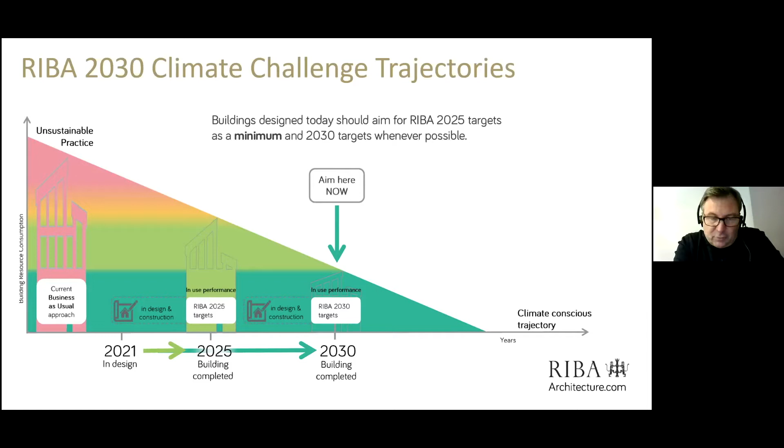We can see here at the left of the slide, this is the current business as usual approach in terms of building regulations. Most of the time we build buildings which are unsustainable, and we know it's unsustainable in terms of its operational and embodied carbon. What we're trying to say to everyone is actually we've got to start now in 2021, because the time that we're on the boards now, and generally a life cycle of a project for a larger project is 3 to 5 years. So by the time you design it now on the boards, it's 2025.

It's going to come into operation, and then we need to be on the way towards net zero, because in the big scale of things, we can't build any new buildings that are going to add to the problem. We're also encouraging a deep retrofit strategy approach, where really by 2030, all new buildings and all deep retrofitted buildings should be net zero. And that's really then the elephant in the room - we've got to deal with the 45 million existing buildings that are the worst performing in Europe.

So the point here is really saying, start now. 2025 is coming around the corner, and it only really gives most design teams about two iterations to get to a point where we're delivering net zero in practice. So that's really the urgency of the situation.

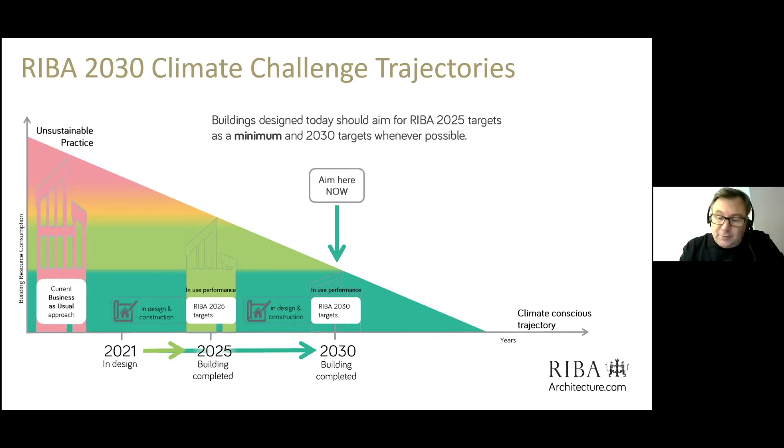I'm just going to show some examples of how I've tried and come close over my career, which is now 30 years, and I would say I'm not satisfied. I've come close, but it's extraordinarily difficult, and I'm not finished yet. Really, with the work at HOK, and obviously trying to persuade others, we've got to do better, and we're going to do it more consistently.

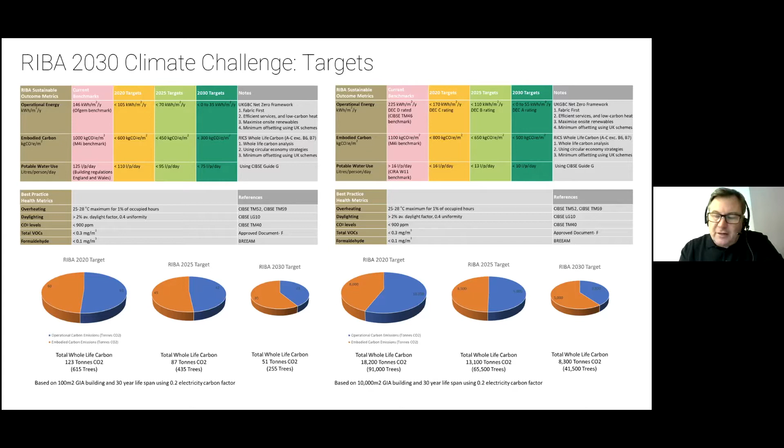It's 70 kilowatt hours per square meter, which is a 68% reduction from our 2030 target, which is within that window. We're trying to get down to 70-75% reduction before you factor in renewables and offsetting, and that's probably where we think the sweet spot is for non-domestic buildings. But that's without renewables—no PV, and no heat pumps either. It's a passive house approach, and it's a fantastic building.

Again, I'm sure you know it well from Cambridge. Anyway, that's our target—how close have I come? Well, not as good as that, really, I'm afraid. The final bit is that all that data is going to be in the awards as well.

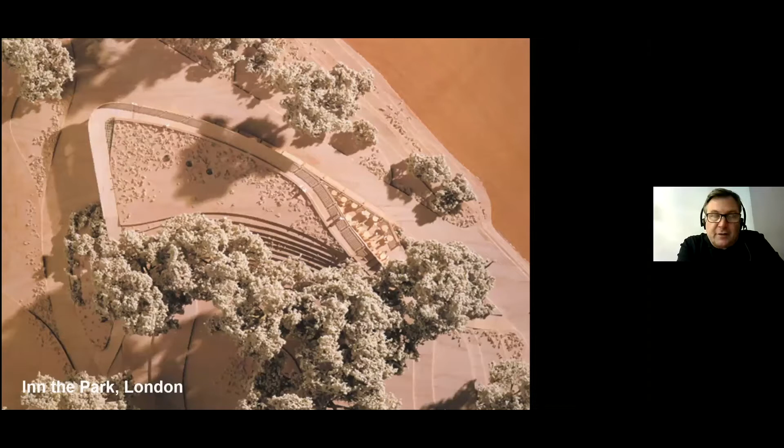So the first one is from when I left academia and joined Hopkins Architects, and really shared my philosophy in terms of expression, especially natural ventilation, and how to use that for meaningful expression of architecture, but also to achieve low energy buildings. My first project was this small pavilion in St James's Park in London.

It was an earth-sheltered building, and the reason was the very high scrutiny in terms of planning from both the mall and around. It had to be a very low profile, but obviously part of that earth sheltering is very much an ecological approach to building in terms of low profile, low impact. But obviously there's a story to that in terms of embodied carbon.

Effectively, it follows the listed path of Nash. So the front curve of the building follows that path, and that line is actually listed—that's why it's that shape. Then we had to weave that between the existing trees, which we couldn't risk knocking down, and that generated the whole concept of the building, with the path weaving over the top and through the trees.

Then we were trying to make this wholly of timber, again for obvious reasons in terms of embodied carbon. We went through a whole exercise of choosing what type of timber, but we wanted one that would age gracefully, with no petrochemicals in terms of its preservation—only a few timbers hit that bill. This was larch. Now, the larch in the UK, unfortunately, is a bit too fast growing—it's good for cladding but not for structural purposes, so we had to go to Austria.

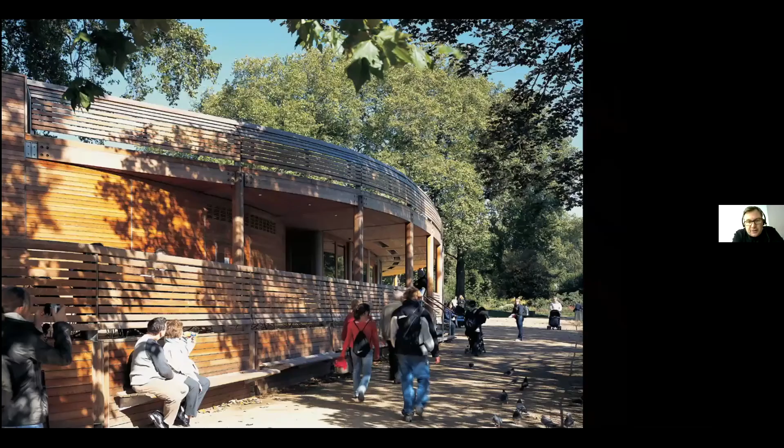These are the logs when sawn into the major planks, and this is the finished building. We can see the front of the building, all timber structure. This is when it was completed, still quite honey colored, a lovely color, and it's been left uncoated to silver naturally.

But unfortunately, in city centre pollution the particulates in the air actually darken the timber a little bit, so it doesn't silver as well as we'd hoped. I think if it was in maybe rural Cambridgeshire, it would look even better.

But the idea here is using basic principles. It's facing a south east location overlooking the lake, setting up layers where the public can engage, interact, and sit in the building. Then you create the loggia, a sheltered area providing shading, gradually going into the various layers of the building, and along the top there's a walkway where people walk over as well.

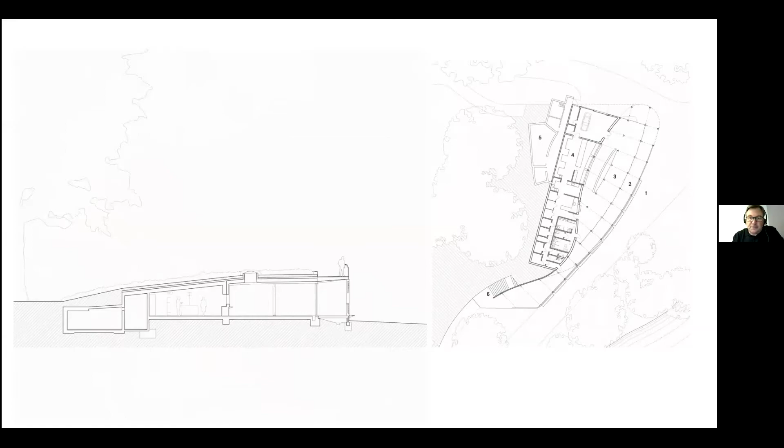You can see it from the outside, gradually coming to the rear of the space where the servery is, which is the front of house and back of house area, and roof lights are introduced to balance the daylight and get fantastic light.

The front of house is all naturally ventilated, and it uses the kitchen extract for thermal recovery, which drives the major ventilation strategy. There are automatic vents at the top and manual sliders as well.

It provides this lovely spot in London, and it really embodies this sustainable aspect, that operational energy is one thing, embodied carbon is another. We had to introduce some concrete because of the weight of the soil above, but it's about health and well-being, regenerative, restorative design principles, creating a lovely place that will be sustainable because people love it and will hopefully use it for many years to come.

That fed into another project which crossed over with Bill Dunster, the Jubilee Campus at Nottingham University. This is a fascinating side of it - it took a brownfield site, the Raleigh Bicycle Factory, and created a new campus for Nottingham University. These are the pavilions that were created, a concrete structure with a 50% GGBS cement replacement, which helps a little with the embodied carbon.

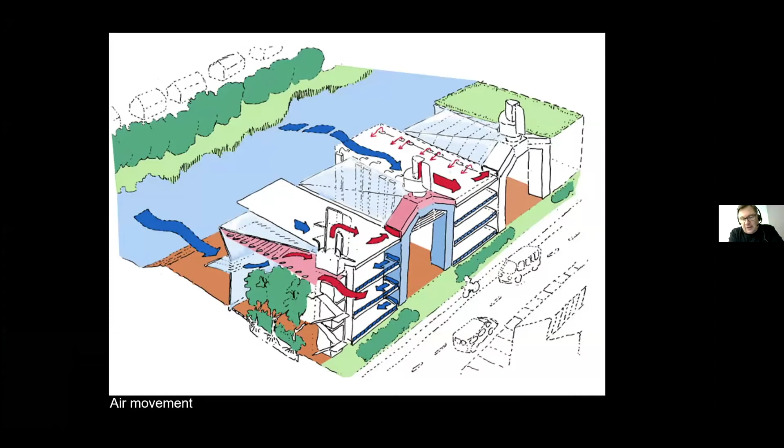And then that's free venting. In this case there was a wind catcher, a combined wind capture and extract over the main cores, which helps drive the actual mechanical ventilation.

It was then developed a little bit from the wind catcher, but you can see here a diagram of this package plant, really lovely design, working with ABB in terms of the bespoke plant, a big thermal wheel in there, and then incoming air mixing with the thermal recovery with a ventilation bypass towards the rear, and the wind cowl reducing that velocity just to maintain that negative pressure.

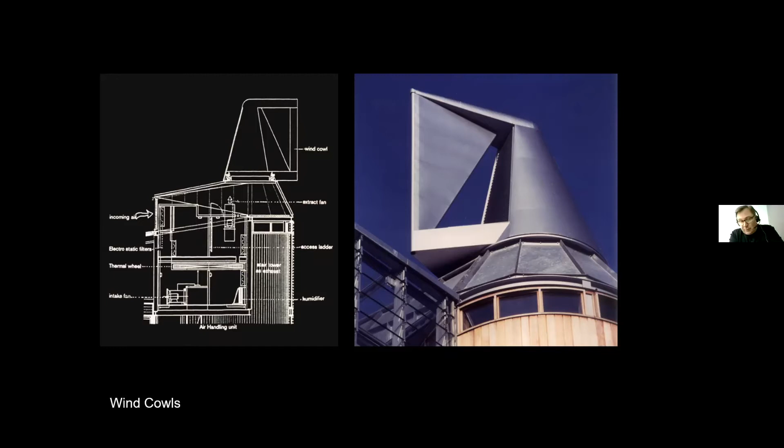So again, the thing here is the university, this work, it's really an expression of this kind of natural ventilation, which is very much part of my early kind of work as well. So that's why I was naturally drawn to Hopkins. And this is the final shot in the front. This is the business school, the last phase on that.

So we were using soft landing principles, working through and looking at the previous phases. It's slightly different in design in that the client - I started off saying, well, let's build another version of one of these pods, but the client wanted the larger building for the same cost, and it had been 5 years different. So again, that's why we lost a little bit of the wind cowls. But working with ABB, we managed to minimize the reduction in energy use because of that, using the same principles again.

So all that then fed into another building at Hopkins, and this is one of my last ones there. It was the Applied Research and Development Center at Northern Arizona University. And it's quite an odd assignment.

So this is where the university - the estates director was at a conference at Jubilee campus, loved it and said, I want these guys to build our new building. And they wanted the greenest building in the world at that point. So again, it was a big challenge, that one.

And this was a lovely facility which was taking all the ecological and biological departments in terms of postgrad and research, and put them into one building. And again, it's that incubator type approach where all those ideas would actually be cross-referenced. So it was really a real center for that.

When we actually did the competition, I calculated our carbon emissions of flying out as a small team every year, every couple of months to do this. And the benefit of the reduction of energy that we were aiming for the building would far outweigh anything we were traveling with. So I think we had to be very sensible about that in terms of how we do it. But we worked with the local architect as well, so we didn't travel over too much.

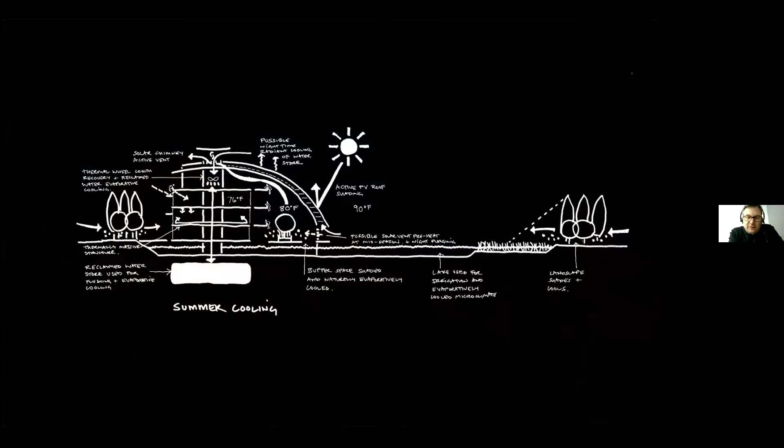And then really using the principles of what we'd used on Hopkins before, you've got this kind of central core of a heavyweight building for thermal mass, linked to ground source heat pipes, and then sheltered with a kind of atrium type space.

This location was facing southeast rather than south, but it's quite high altitude in terms of Flagstaff. It only reached about 75 even in midsummer, so it's 7,000 feet up. So again, the climate was very much closer to a UK perspective.

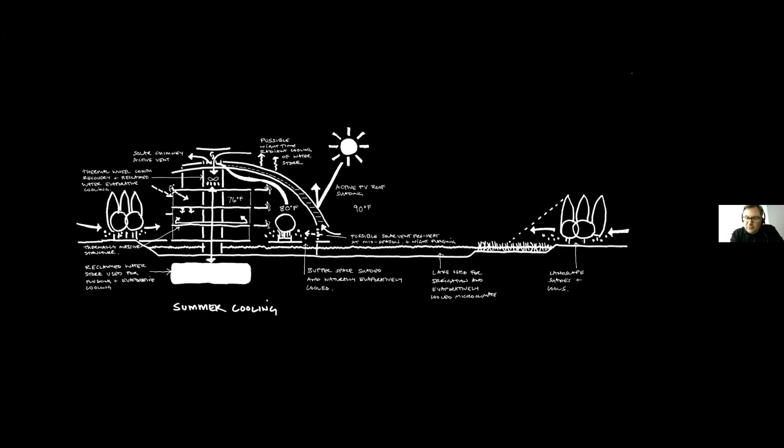And this is going to approach it at the base there. It was just this layering effect, creating a street where you have interaction of all the departments and all the staff there, movable green screens as well, and then other departments fanning out towards the north there. So it's almost like shop fronts.

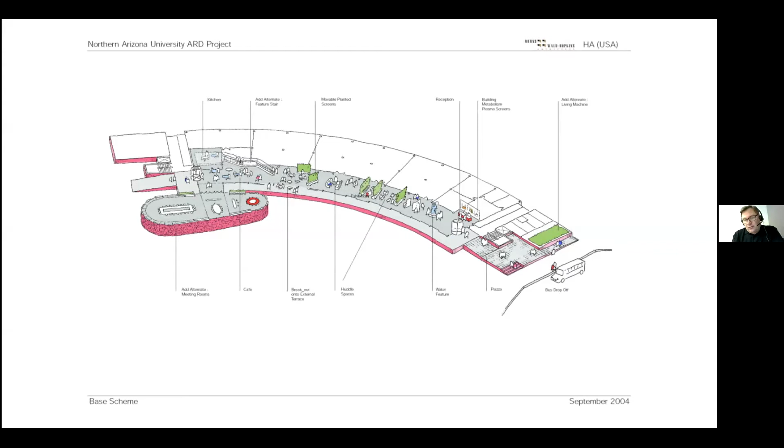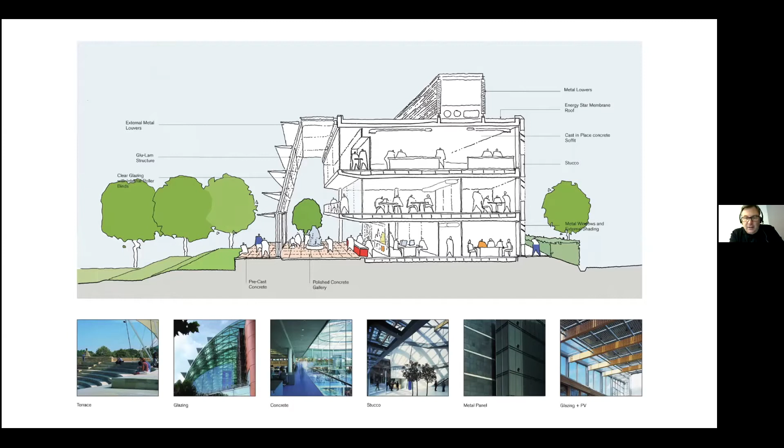And this is the section a little bit more developed here, showing the kind of terrace. And we used examples of other Hopkins buildings - this is Dynamic Earth toward the bottom left, we've got Evelina as the glazed atrium, we've got the Forum in Norwich, another one of my buildings, using that kind of concrete finish, and then aspects of Jubilee campus there, creating a lovely kind of section.

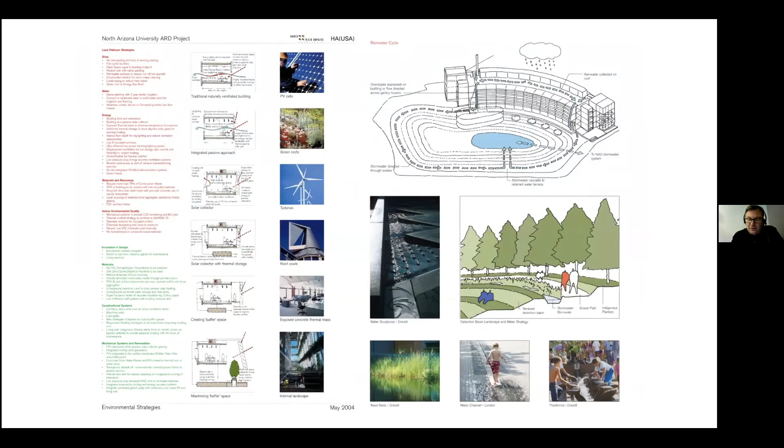You won't be able to read any of this, but it shows that even back then, the entire sustainable outcome cycle was considered with ARUP, our engineer. The whole life cycle, even the water cycle of how we dealt with rainwater, was part of that mix—it's all integrated. Great project and good delivery.

This is a couple of shots of the finished building—this is the atrium facing southeast. All the external louvers were tuned to that direction in terms of orientation and size. And then the inside of the space, getting good quality daylight in there with no lights on, gradually coming back into the departments. Really lovely building, and well loved.

I think that's the thing. Oh, one final thing is the timber you see there. I tried to use timber on the outside, and it was a curious thing—different cultural perspectives. We're trying to use much timber in the UK, but the green fraternity, especially in the mountain areas of the States, were very sensitive about using timber because they know there's been quite a lot cut down, so they avoid using too much. But we actually managed to get this timber glulam in.

This is actually glulam timber from trees caught in a fire—the Rodeo-Chediski fire. The core was still okay, and they were salvaged and made into glulam. A lovely story of using some of that timber.

At the end, we did deliver in terms of LEED—this was the highest LEED rating at the time of any building, and I think we almost got full marks. At that point, 62 or 64 was the maximum, so we got that LEED platinum rating.

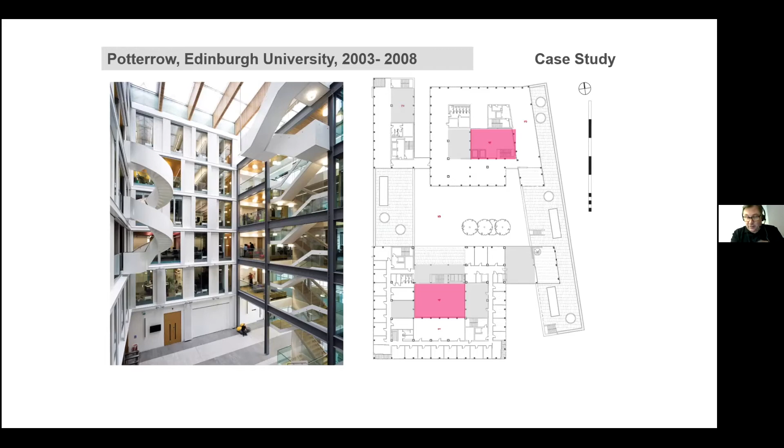We can see here this is the diagram, which is very simple—tuned in terms of the depth of the building, with large atriums in the centre which act as stack drivers. It's a mixed-use scheme as well, but really trying to get that nice quality of daylight throughout the building. You can see here, this is a very lovely, very active frontage, picking up similar principles to the building in Arizona.

This is our environmental diagram, again showing the classic stack effect. I was a bit concerned—I think it worked out fine in Edinburgh, but I was concerned we didn't have much of a reservoir at the top of the atria. But in the net result, Buro Happold, the engineer, used a bit more fan power to make sure it didn't overheat on the top floors. Again, it worked well.

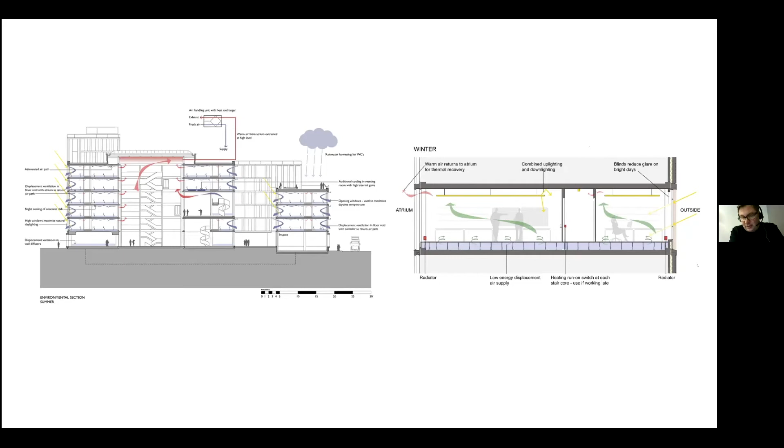Lots of tuning issues when we were doing the handover—very in-depth discussion, especially trying to balance up the displacement ventilation system. And this is a view of the inside—really fantastic spaces throughout, and again, well loved.

The sustainability is all there—it's a lovely building with quality of light, good health and well-being, and an asset to the university. It's really seen as one of their best buildings.

This is a small project that unfortunately didn't get built—that was in the last recession, so I've got more projects that have actually been designed than built. I think that's the reality of practice. But this was a great project—this shows them right in the foreground, and you can see some wind cowls.

So all the lessons and things I'd really be keen to build were really integrated into this project. This is a commercial office building, and this is what it looked like when we found it. The client was great - an ex-architect who really wanted to say, okay, rather than knocking this building down, let's see what we can do, retain the embodied carbon, and try to show a showcase of how you can do a deep retrofit to an existing building and actually make it attractive and sellable.

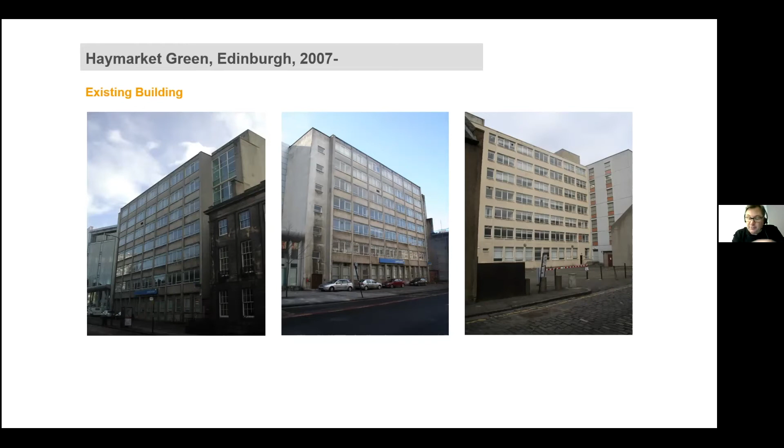So what we did was we clipped on a new core, cleared out all the existing things in the building, and created more open, flexible floor plates. Working with Max Fordham's on this one, we actually stripped it all back and exposed the concrete.

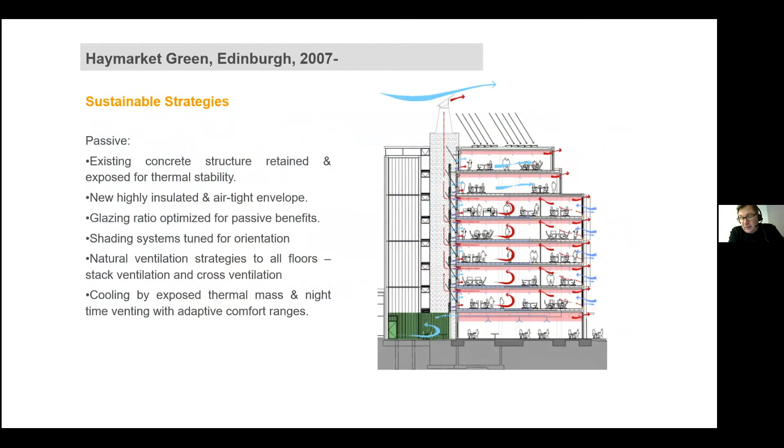Working with Max Fordham's, they did some CFD analysis as well, and we said, right, this is a naturally ventilated office. Can we do this in a city centre, a busy city centre, with all the pollution and noise and so forth? In terms of the modelling, I think we could do it, but it's a shame we didn't manage to finish it in the end. But there we go, and this was the kind of net result.

Remember, this is back in 2007. You can see here we were trying to head for a 75% reduction in CO2 emissions. We talked about natural ventilation being possible. We were looking for an A-rated EPC, BREEAM excellent.

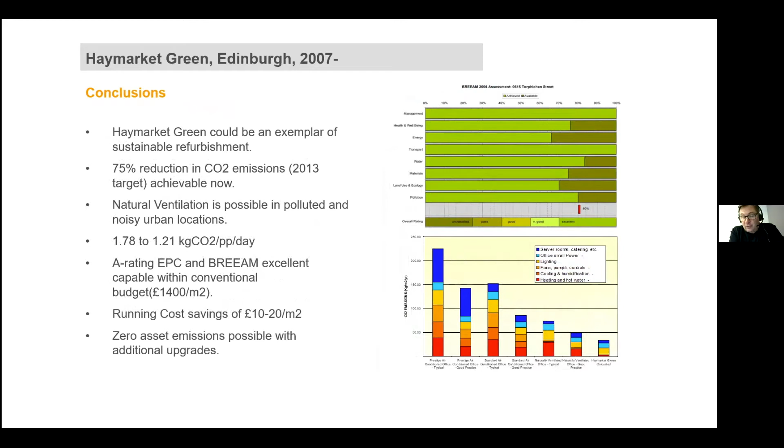And then the budgetary side was interesting - we saved about £400 a square metre by retaining the frame. Not only that, but obviously the embodied carbon as well. And the running cost, because of the more naturally ventilated approach than the conventional mixed mode or mechanical approach, we thought we could get some really significant savings there too.

So unfortunately, chalked down to experience, and then really onto taking all of those things, still keeping all those lessons in terms of the various other firms. I joined Wilkinson Eyre back in 2012, back to London, unfortunately, with the recession hitting hard in Scotland. But again, great fun in terms of working on some fantastic buildings with Wilkinson Eyre.

So this particular one, another academic building, this is for City University Law School. This is the tower on the corner - we can see this is a triple glazed glass tower. Working with Chris Wilkinson, obviously a fantastic architect, who has very much a Miesian mindset in terms of doing these crystalline towers.

This one was difficult for me in terms of it not being my natural architectural philosophy. But it was a challenge in terms of how could we make it work with building regulations to a U value - we were trying to get a 0.1 U value on that glass tower, which was extraordinarily difficult. So we were really trying to hit everything in terms of this kind of passive house level of envelope design, plus trying to achieve that aesthetic.

So how did we get on? Well, the first thing is Wilkinson Eyre won this project primarily because they were the only firm that was actually going to keep some of the existing buildings on site, which is quite extraordinary when you think about it. The pink ones were demolished - they were pretty poor and fatigued concrete buildings. But the two blue buildings were the best, from the 1920s and 1910s.

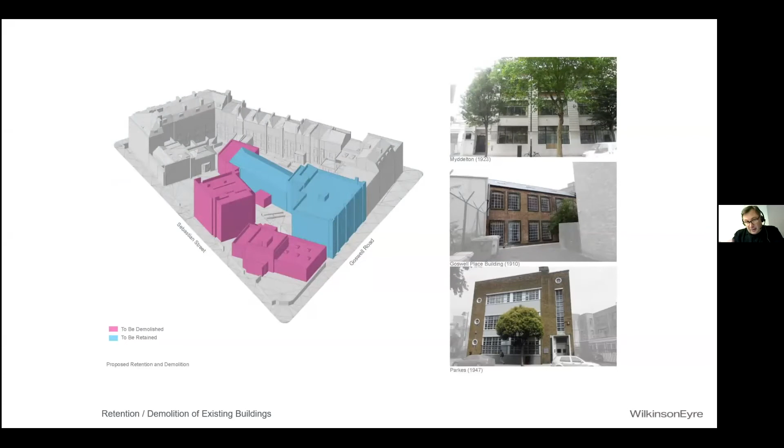So that was it, and we basically used that as the primary thing, then completed the urban block with the new building. So we can see here the plan - this is the 1920s/1930s existing building, and the 1910s one towards the back. We completed the urban block by creating the new building along there, with a new entrance towards the side, trying to build up that density and urban feel.

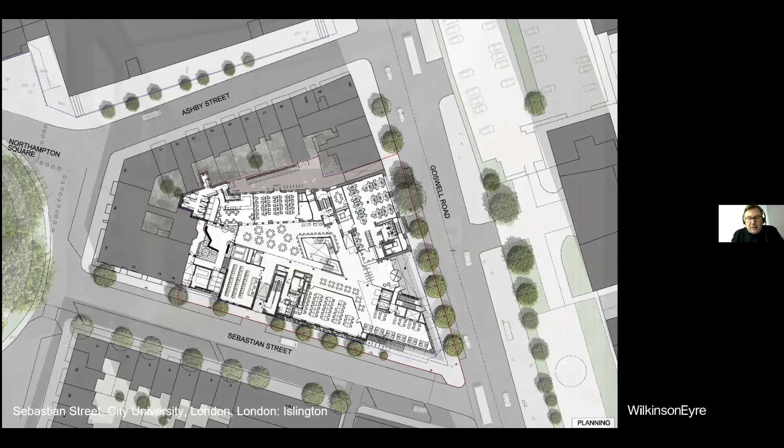This is the kind of space in the center. Again, a similar thing of keeping daylight on the inside, but we had to mediate quite a lot of existing buildings - you see to the left, that's the existing building.

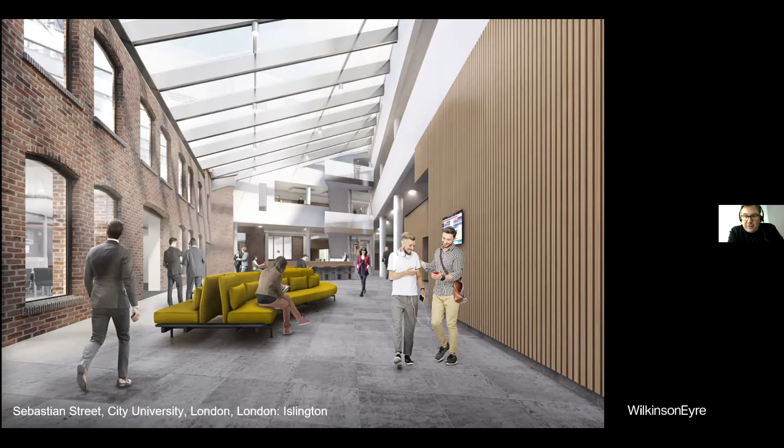Reglazing it and making it more of an open plan area was great, and it adds that character and richness of real material. The brick was on show, adding a dense, real feel, contrasting with simple white plasterboard, exposed concrete, timber acoustic panels, and a nice stone finish for the floor.

In terms of environmental strategy, this one again uses similar passive things, but it's linked to two open loop boreholes that go into the aquifer under London. Quite frankly, I don't think I would do it again. It was so complicated, and there's still a risk that the yield from the open loop wouldn't achieve what's required, so there's actually a backup air source heat system on the roof as well.

So it's extremely complicated. This story is interesting - we started off as mixed mode, and I was trying to push the engineers, who I won't name on this building, to really open up some of the ventilation towards the outside for the lower use buildings, our offices for professors. But then, as happens quite a lot, the computer modeling says it's better to actually do a sealed building with thermal recovery than mixed mode or even naturally ventilated buildings, which is a bit frustrating.

What happens is the cost of doing mixed mode - having all the mechanical systems, low pressure drop so huge ducts, and opening windows - is a double cost. This went through a quite severe VE phase, and something drops out. Invariably, and this has happened to me a couple of times, the opening windows get chopped out. It's a lovely building, but for me to not have opening windows is a real frustration.

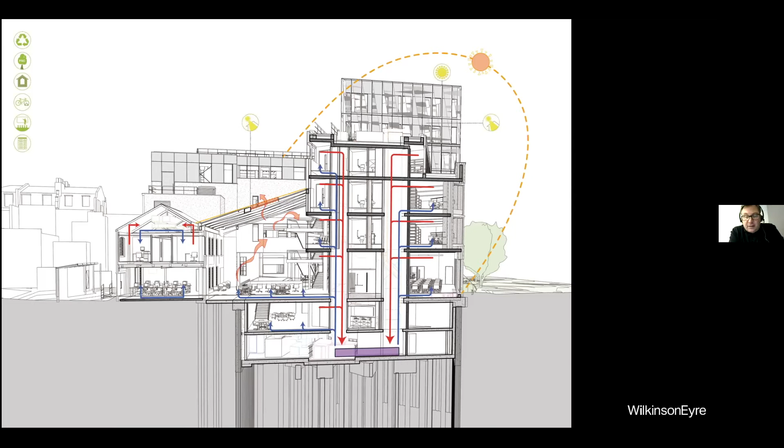That's something I'm really pushing against in practice. So I think any research that helps on that would be really great to hear.

My lesson learned in this one, passing this back through to Chris Wilkinson and others who love glass buildings, is it was extraordinarily difficult, almost didn't get through building regs currently, but with the next iteration of building regs, I'd argue it's almost impossible to do a 100% glazed building. From my perspective, I think that's a good thing.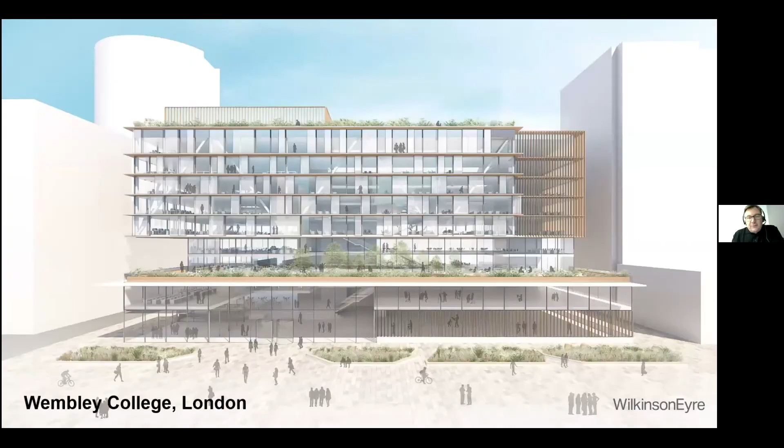Then a final project with WilkinsonEyre, building on all those themes. This wasn't built in the end, but this is my further education college for Wembley College, and we can see the competition drawings here. There was a base of double height - you can see a podium level, and beneath that was all the engineering workshops, foyer entrance rooms.

Because it was an urban site in Wembley, we put all the rooftops as planted space for students to exercise and hang out. We got the podium level, which had the main spaces of the college in terms of social spaces, and then the departments were stacked above that, with a sports hall on the top floor.

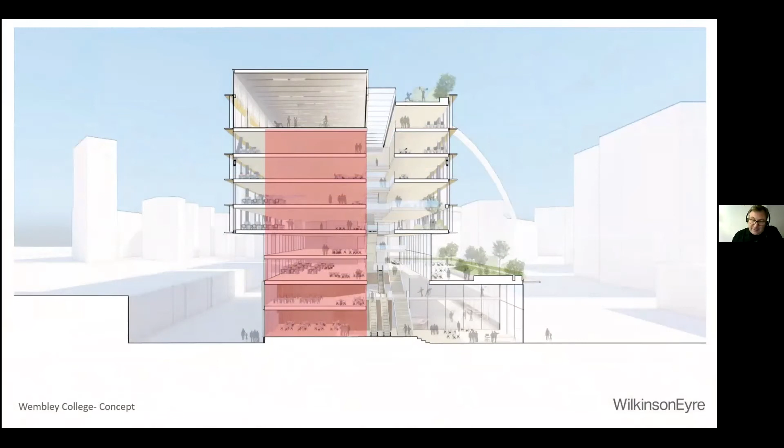That would have been a fantastic project, and we won it because once again we were the only firm that said let's try and keep the existing building on site - that's shaded in red here - and we clip on other pieces to it. To the left you can see clipped on sections, and to the right we created an atrium space, clipping on a new structure as well. The engineers were adept at that.

We were looking at strengthening some of the columns. It was a good structural concrete frame, but using techniques of bonding on carbon fiber, you can actually reinforce the building quite sensitively. This is the diagram which pulled together all the themes we've just been talking about, so this had everything in it. The aim here was to try and hit our 2030 RIBA challenge, plus a decade.

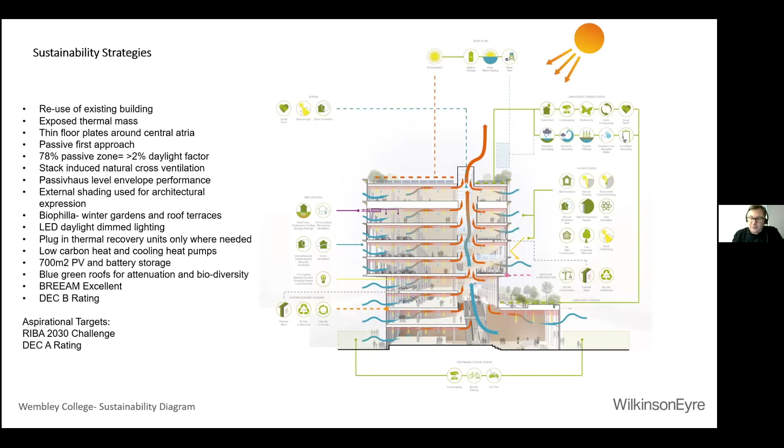Max Fordham's were the engineer again, and all the modeling was looking good, really good in terms of the models. Unfortunately, there was a problem with the lease of the site, and obviously the pandemic came in as well, so I believe that's now been shelved at that point. So again, another near miss there.

Still my passion is measuring things. I try and keep a record of all the predicted and actual energy breakdowns of all the buildings I've worked on, so I've got my own little database. It's benchmarked to Bill Bordass's database. That's why the carbon emissions ratings are 0.19 and 0.46. I just convert back, but now I'm going to reuse everything in terms of just energy.

So I've plotted Hopkins and Bennetts buildings against this, and really said okay, the TM46 benchmark is 75 - in the old days, 75 kilograms CO2 per meter squared. Obviously that's before the rapid decarbonisation of the grid, and we've got to hit 75%. So just looking at where we are on our journey.

We can see that generally Jubilee Campus did pretty well. Now these are pseudo-predicted, so it was basically working with ARUP at that point. We were using benchmarks, CIBSE TM46, and then looking at some of the real world data that are coming out. So again, it's pretty close, I think we can see there.

But this is actually just for the regulated energy, that doesn't include the grays, which are the unregulated. So from this one you can see quite a few things - they're hitting the 75% for regulated, but again the unregulated energy takes us over that 75%. So it's quite an interesting diagram.

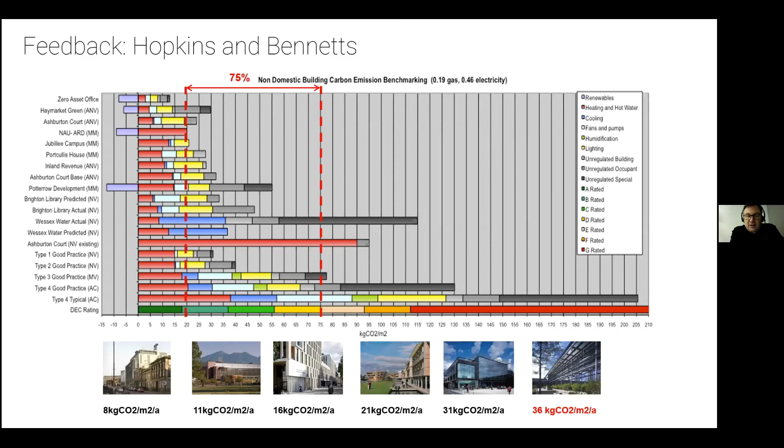So that's that one. And then I did it for WilkinsonEyre here as well, and topically, your Northwest Cambridge, which is obviously quite close to that - I'm sure you guys know more about it than I do now. But that one is obviously predicted, so that's why it's grayed out, and obviously at zero was the target.

Again, I know there's some issues with the CHP engine currently on site, and I'd love to get back in and find out what the real energy use of Northwest Cambridge is. But you can see there again, the regulated was doing quite well in quite a few of the Dyson buildings, the WilkinsonEyre buildings, including our Dyson project, which had one of the largest ground source arrays in the west of England.

And then really coming to Oxford Earth Sciences towards the bottom right, that's where we had measured data, so that's why it's all dark. The regulated was at 15 kilograms CO2 per meter squared using these carbon conversion factors, and that's 46 kilograms CO2 per meter squared - going to around about the 150 kilowatt hours mark. So doing well, but not quite there.

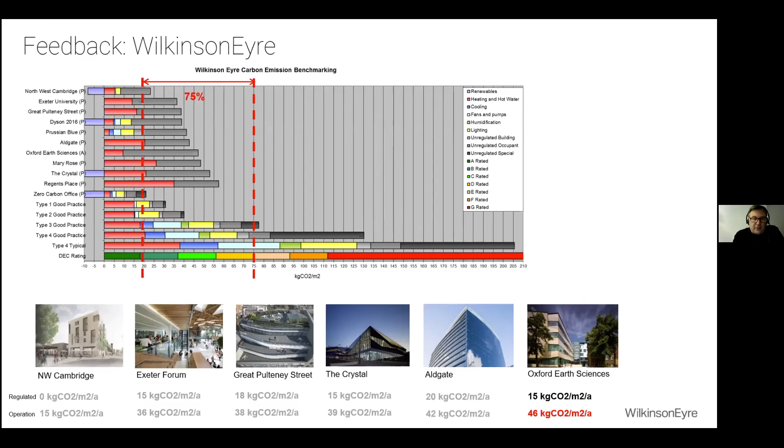Then just a couple of things on HOK to finish off. I've been here a couple of years, I head up the science and technology sector, but also oversee sustainability for the London studio as well. It's really joining a global firm with sustainability at its heart. The old chief exec, Bill Odell, 20-odd years ago, wrote his own handbook of sustainable architecture, and that was mandatory reading up to about 10 years ago - there's still copies in the office. So HOK really do believe and try really hard to deliver on sustainability, and it's extraordinary.

I was quite surprised, but it's closer to more of a TM54, which is closer to reality than perhaps some of our own Part L debates now. So anyway, that's all great.

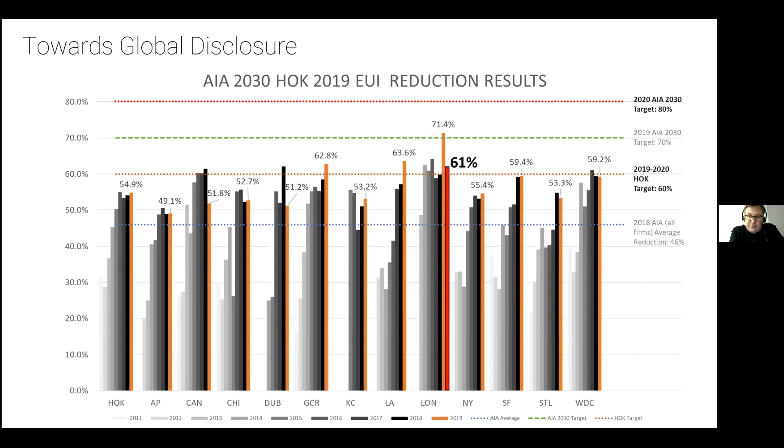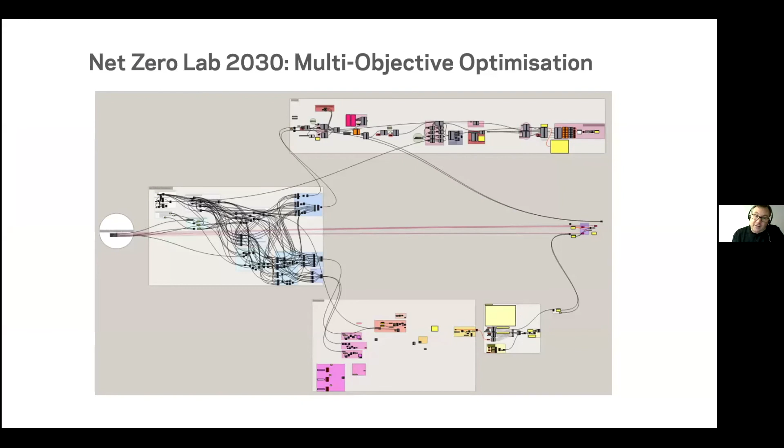Now, the two of that, what I've done is I've picked up through the lockdown. I got some of our really great, fantastic modelers, physicists in the studio to run some scripting. So this is kind of the script behind it, but we've been running optimization strategies to see how close we get a lab to net zero, and how close it is. So the benchmarks we used, again, there's very few benchmarks for labs, unfortunately, in the UK.

So there's S Labs. There's a study done about 10 years ago, we can see it there. And roughly it's about 600 kilowatt hours per square meter. Contrast that with the American I2SL, which they've got 1,000 labs database and really sophisticated, one of the best I've seen. And really the average of that is about 900 kilowatt hours per square meter. So really large and high intensive buildings.

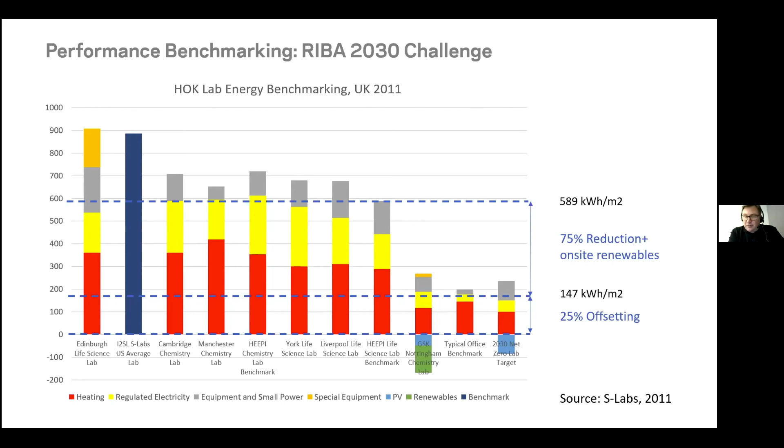And then really we're trying to aim for that 75% reduction. So you see that we're trying to get to 147, including on-site renewables. And the 2030 challenge is really saying, well, look, that's probably a good balance point if you can get that close. And then you're allowed to offset. But there's a whole debate in terms of what offsetting is. We say that it should be gold standard, it should be meaningful, it should be local, regional. But again, so how close can we get to that? So that was our study.

And operational energy, we used online tools, Energy Plus, Honeybee, and so forth. And we did just a kind of optimization study. So we got to around about 60% reduction. And this is the first cut. We're going to run this again with an IES model, probably in a couple of months' time.

And then that allows really, what we're saying is we need 15% renewables. But again, the air source heat pumps obviously counts for that, as well as some PV. But in dense urban situation, obviously it's quite limited in terms of how much you can integrate into that, and then allowing that 25%. So we think we're in the right ballpark for operational energy, ventilation being one of the critical things. So that's going to be a specific study that we're going to do next year.

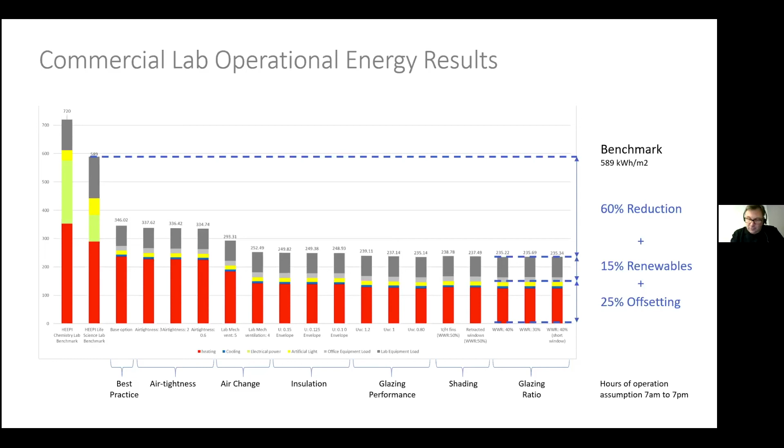And then embodied carbon was kind of quite interesting. So we run 3 different models. One is a base case, which is very much conventional. It's in situ concrete, precast concrete panels with insulation, and raised floors, suspended ceiling, so forth. And you can see that base there, so the baseline, and that worked out about 44% reduction from the benchmark, which is 1,400 kilograms CO2 per meter squared, which is probably pretty close to where we all are.

Then we run a different version, so saying more precast concrete, trying to lighten the structure, using a bit more steel rather than in situ. The conventional theory is obviously in situ is the worst case, but actually that was interesting. That showed a higher embodied carbon, mainly due to the amount of kind of steel we had to put in. And it's all about the vibration analysis of lab buildings. We need to get to the vibration criteria of an operating theatre, for instance.

So that really increased. And the final version was all timber. So this is where we used structural timber, glue lam columns, beams, CLT floors. We had to introduce a screed topping on top of the CLT to minimize that vibration criteria. But again, that was fantastic. That got down to 60% reduction. But interestingly, this is before sequestration.

And again, there's different models. The American version doesn't include sequestration because they say, well, how do you know that carbon you've locked into the building is going to be locked there forever? You don't, unless there's something written into the lease.

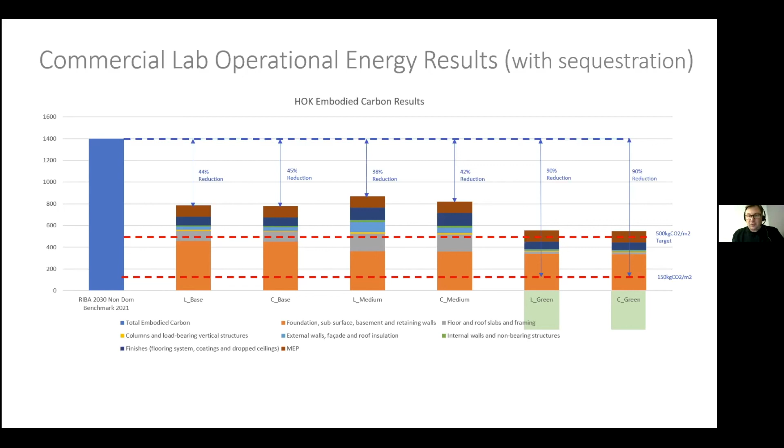So that's really what we're trying to aim for. That's current, hot off the press. That graph was done on Monday. So just finalising and pulling up a few threads.

So these are the responses, taking all that theory and practice and trying to put it back into policy. These are the things I've written for the RIBA, which has then gone back into government. So these are a set of recommendations that we've been lobbying.

The first one is targets trajectory. What we've been saying is the government's got to acknowledge that we need to set that trajectory, and the 2050 target in COP26 for me was really just a bit frustrating. Boris and most of them are trying to solve the problem through energy supply, and they forget about the energy demand reduction you need to do. I think you can't achieve the former without the latter.

So we're trying to get our 2030 challenge written into the new building regulations, trying to also say it's in-use verification and performance targets - you can't just use prediction methods. Trying to get the government to do the net zero retrofit, or the Part Z part of building regulations - that's a very big thing, and I think we've only seen the government just dip their toe into it. And then specifically saying about EUI targets and design for performance tools. We know they've picked up the design for performance tool because we understand they're actually working in the background on that. So I don't know much more than that, basically.

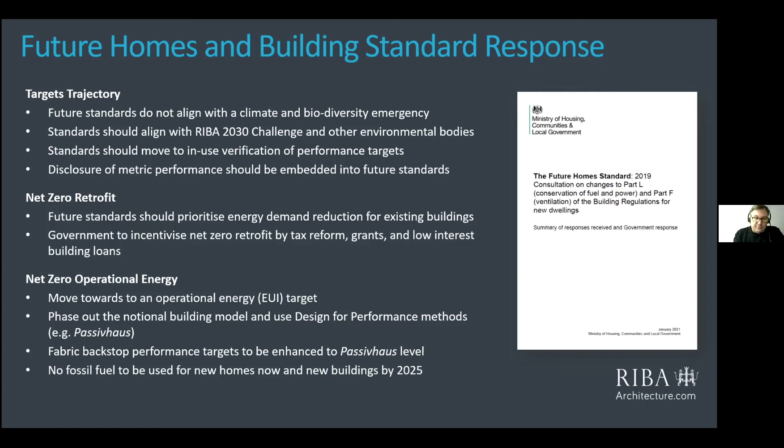And then trying to include embodied carbon in the new building regulations. Again, we've heard some positive noises on that, and some colleagues presented to the select committee last week on that. So hopefully that's going to come through.

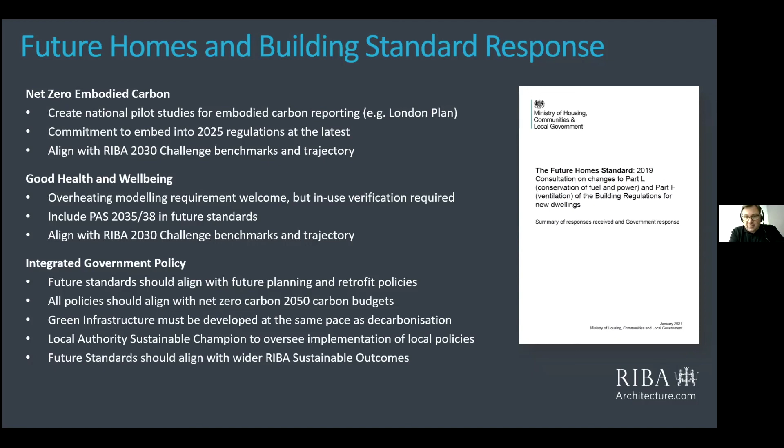But notwithstanding everything in the previous rush to net zero back in the early 2010s, we've got to think about good health and well-being. So again, it's that thing about in-use verification, overheating, plus obviously indoor air quality is absolutely critical. And it needs to be integrated policy - planning and building control have got to be done together. And if you don't have them together, then that's where it all gets a bit confusing.

And then just going to leave you with 10 things which I say to all my staff inside, and obviously to colleagues when I'm presenting. These are the 10 things that we need to do now.

First one is agree your outcomes with your clients. Again, use that metrics in terms of sustainable outcomes. Think about the circular economy. Design for net zero performance - this is measurement and verification. We've got to increase biodiversity, and for us it was promoting this kind of 20% net positive gain. Low embodied healthy materials, and again that robustness and long life comes in there. Not forgetting well-building principles of good daylighting, air quality and acoustics.

And then the passive design approach obviously goes without saying, but thinking about regenerative engineering is really how we work with our engineers. And that's where, again, from the Martin Centre and CAR, I know that integration of the two together - that's how we're going to solve it. We can't solve it alone by ourselves. Saying no fossil fuels, that really for us is the end of that particular phase.

And then finally, to close the loop, is to design for POE and actually carry out POE as well at the end of the day. So thanks very much.